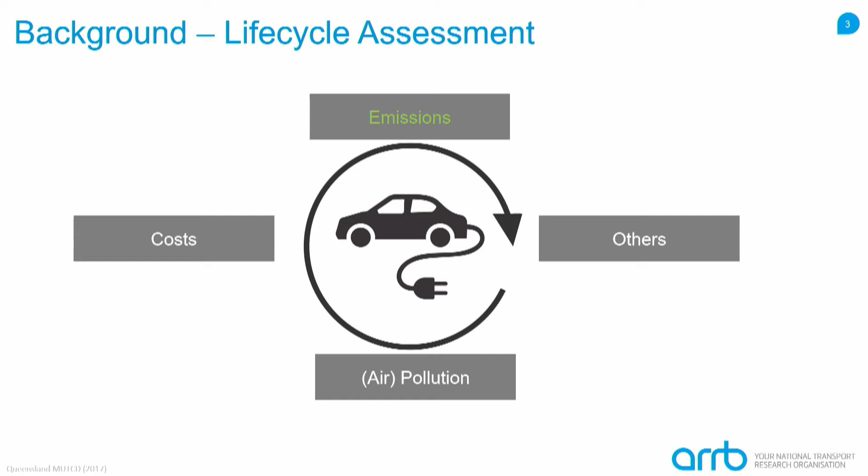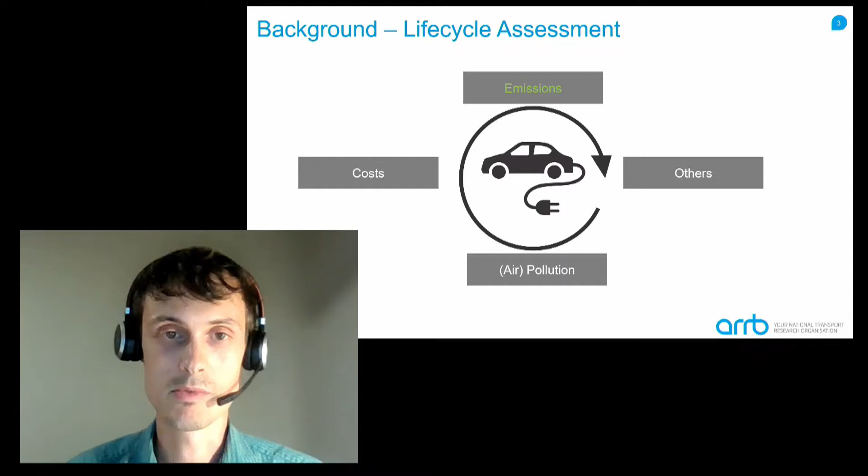As I mentioned, life cycle. When we talk about electric vehicles, we have to take into consideration different things such as costs, air pollution, and of course the emissions. Emissions is what I want to talk about in this presentation, but there are also quite a few other things. What I've been involved in personally is research on the costs side, the air pollution side, and other things such as the noise of electric vehicles, and saving fossil fuels for other applications rather than burning them in our cars. But this presentation is about the emissions, which is certainly an important aspect.

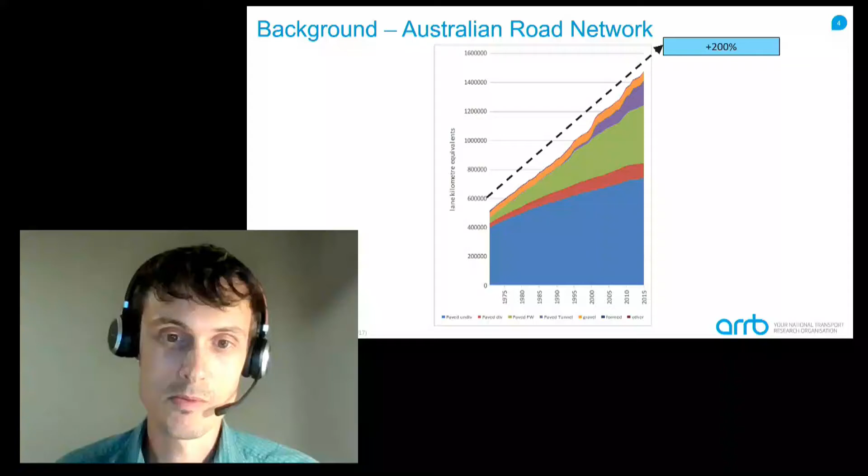A little bit of background - these slides show Australian data, but it may be a little different in other countries. If you look at the road network from the 1970s until today in Australia, there's a growth of 200% in our road network, and most of these roads are sealed roads, freeways, which means if there are more roads, there are more cars as well. That's actually shown on the next slide, where we can see the growth of the vehicles operating on the roads.

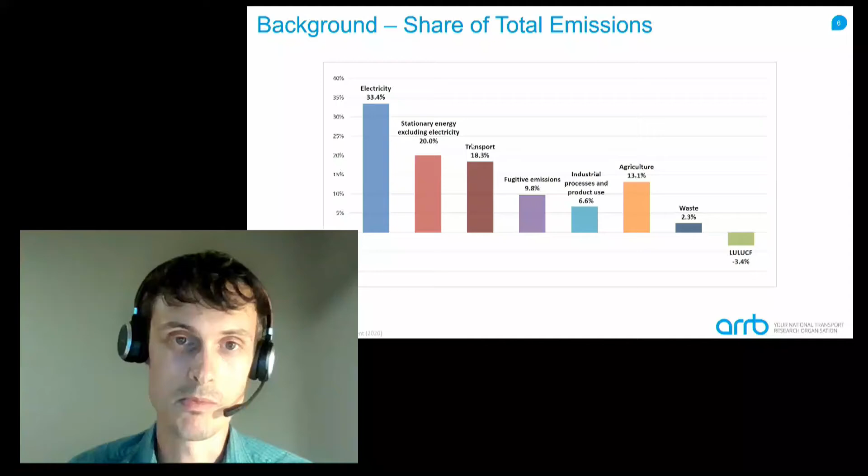This is another slide, again with some data from Australia - it might look a little different in other countries. We can see the brown column in the middle, which represents transport emissions as a share of the total emissions of the entirety of Australia: 18.3%, almost 20% of emissions come from the transport sector, and a third of emissions comes from electricity generation. If you highlight those emissions, we can see that most of the emissions from the transport sector are actually from road transport - not trains, not ships, and not airplanes.

It's road transport. So there's a massive potential to reduce emissions if we introduce cleaner electric cars, or cleaner modes of transportation in general on our roads. And if we can reduce electricity emissions as well, that's a very important point to consider when we talk about electric cars - we can't keep using the electricity we generate today, which in some countries is generated more by fossil fuels than others. So we need to transition to more renewable energy at the same time as we transition to electric vehicles.

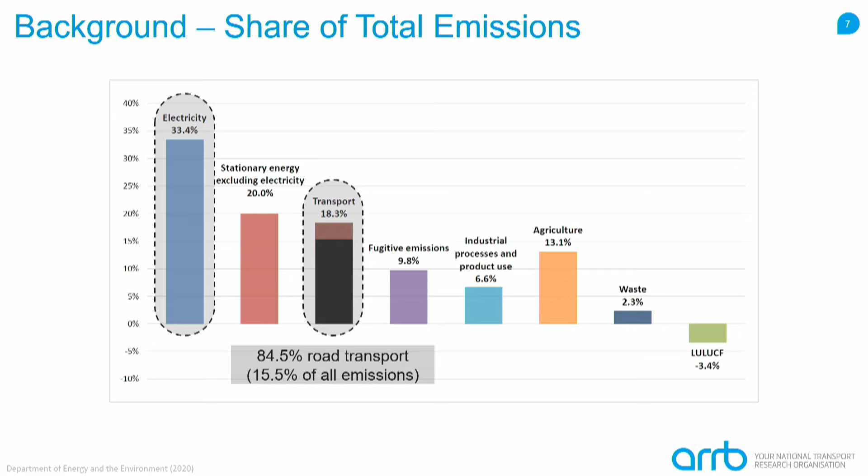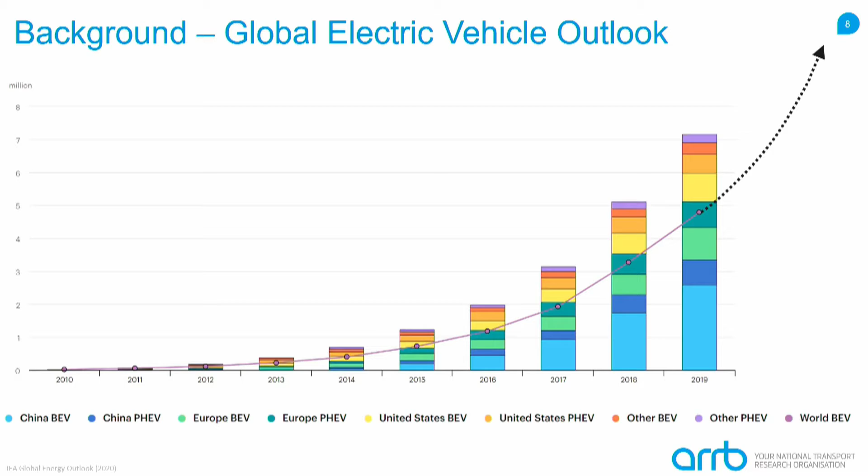Then I want to talk about the different phases: the manufacturing, the use phase, and the end of life of the vehicle. This is a very brief, high-level overview, but it gives you a bit of an insight into what I'm talking about here.

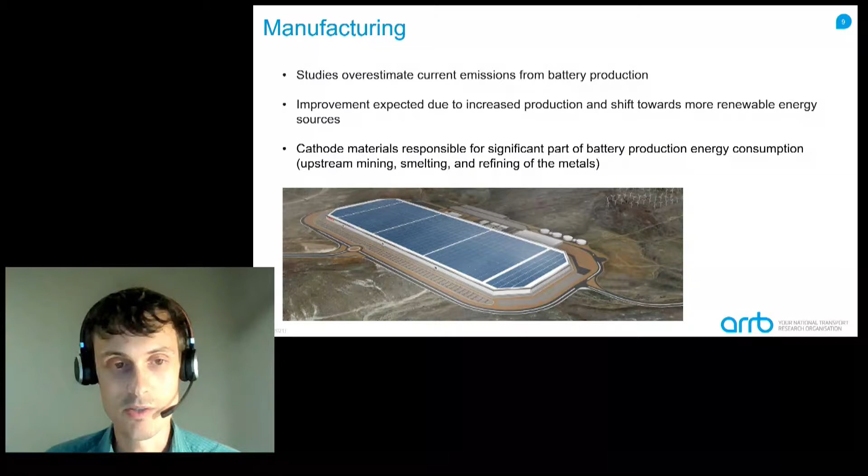In general, if you talk about manufacturing emissions, an electric vehicle is not so much different compared to a normal vehicle, except for the electric drivetrain compared to the diesel or petrol drivetrain. In particular, we need to look at the emissions from battery production, which is the majority of the difference when considering emissions from a battery electric vehicle compared to a petrol or diesel vehicle.

In the past, emissions from battery manufacturing have been estimated, but the studies we found are a little outdated. They use data from low volume manufacturing and average electricity mixes, which are going to become more renewable in the future. So overall, the estimated battery emissions in many studies today are a little too high—they're going to come down in the future. That's something we need to consider, although overall, emissions from manufacturing a battery electric vehicle will be higher than for a petrol vehicle.

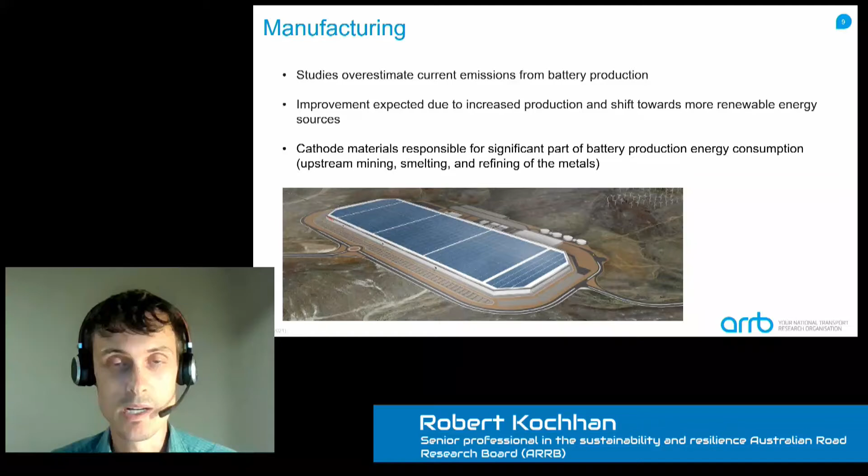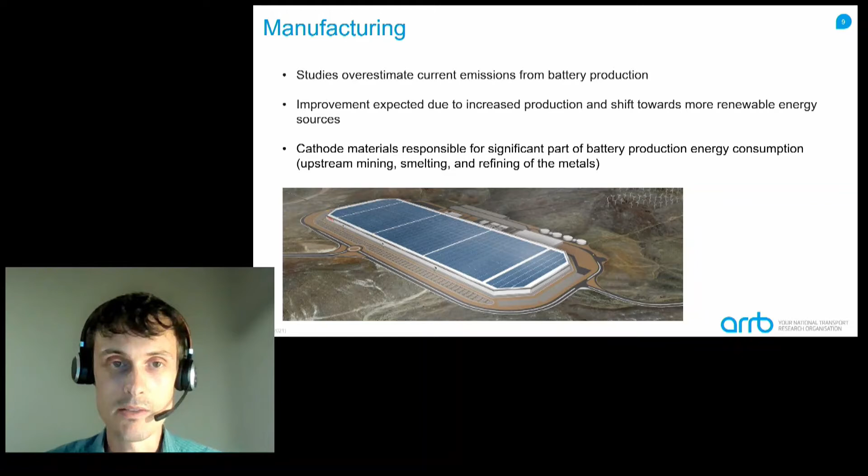This is mainly because there's a lot of energy that goes into the extraction and production of raw materials used in the battery, like the cathode materials, or the mining and refining of materials and metals. So there's still a bit of a disadvantage for electric vehicles in terms of life cycle emissions at the beginning, during the manufacturing stage, but that can be offset during the use phase. I'll talk about that a little later.

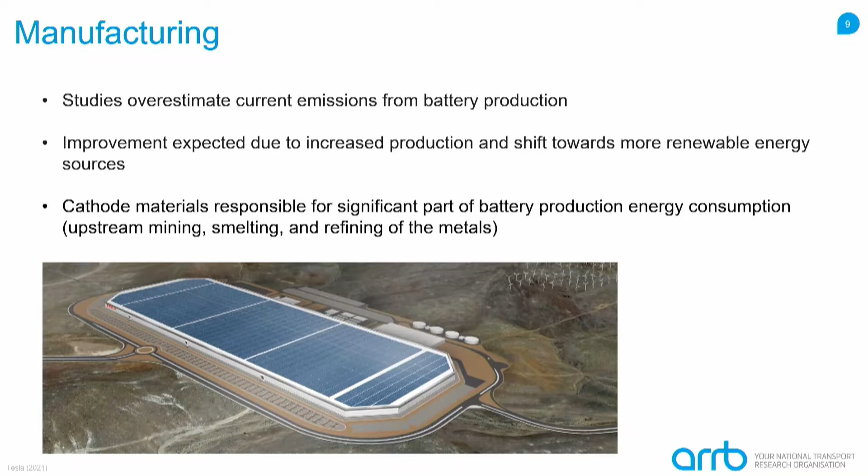The picture below, by the way, is one of the gigafactories of Tesla in the United States, with a lot of solar panels on the roof. That highlights that battery manufacturing may be cleaner than we think today, because of all the renewable energy used in this particular case.

Going on to the next slide, we see two different graphs showing what impact the carbon intensity of battery manufacturing has on the overall life cycle emissions of a car. On the left, the y-axis shows the savings potential in percent, and the x-axis shows the carbon intensity of the electricity generation. Of course, the more fossil fuels used to generate that electricity used to produce the battery, the less savings potential there is.

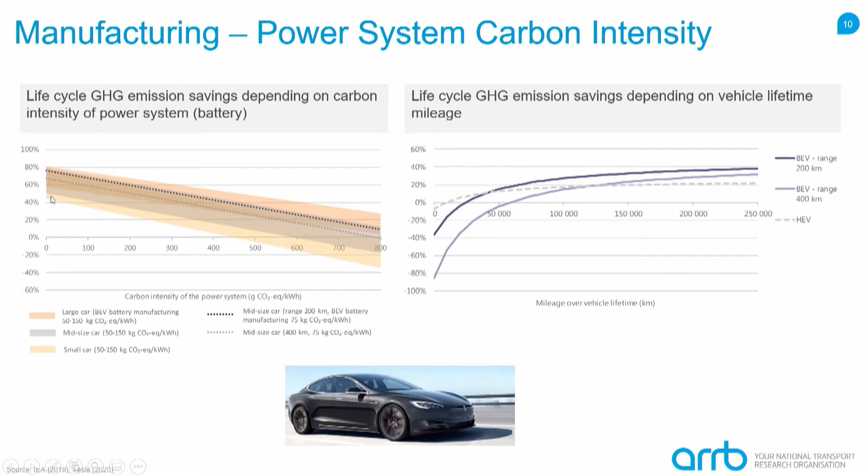If you get to a point where we have 600-700 grams of CO2 emissions per kilowatt hour of electricity used to produce the battery system, the life cycle emissions advantage of a battery electric car will be minimal. Whereas if we use fairly clean energy, there's a big savings potential in terms of life cycle emissions, 60 to 80% here.

On the right-hand side, that's a similar graph, but depending on the mileage of a vehicle. At the beginning of the life cycle, a battery electric vehicle has a disadvantage—negative 60 to 80% more emissions. But over time, as we charge the electric car with clean energy, it becomes better in terms of emissions compared to a petrol or diesel car.

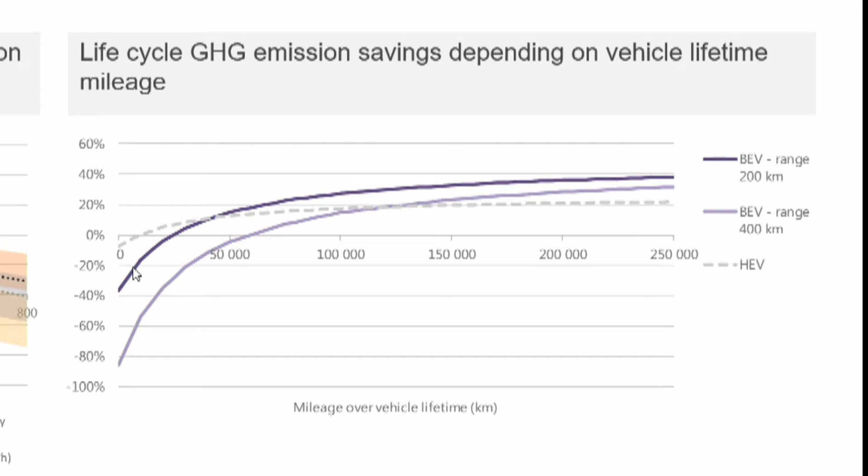Depending on the battery size, there are different lines in that graph. But that highlights that at the beginning of the life cycle, a battery electric vehicle will be more emission intensive, but over time it will gain an advantage compared to a petrol or diesel vehicle.

Then if we look at the use phase, that's the second phase, and probably the most important, because it creates the majority of emissions of the life cycle of the vehicle. I've put two terms here: well to tank emissions and tank to wheel emissions, both of which have to be considered for electric vehicles and internal combustion engine vehicles. Well to tank emissions are those created for manufacturing petrol or diesel and distribution to petrol stations, or for the generation of electricity used to charge our cars.

The tank to wheel emissions are the emissions from burning fuel in an internal combustion engine vehicle. There are no tank to wheel emissions for a purely battery electric vehicle because it's emission-free, locally emission-free. But we have to take both into consideration to get a full perspective of emissions during the use phase.

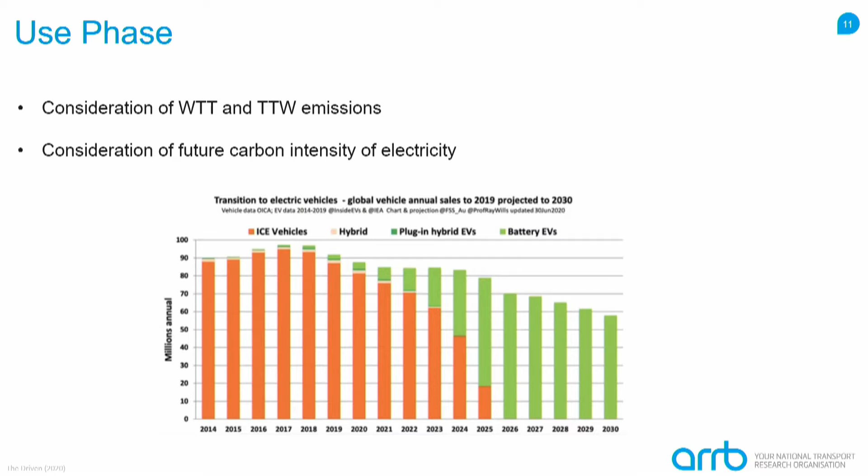We also ideally should take into consideration the future carbon intensity of electricity, because that's constantly evolving. When we do a study, we can't just use today's electricity mix, but have to consider that the electricity mix in the future is most likely going to be less carbon intensive, with more renewable energies in the mix.

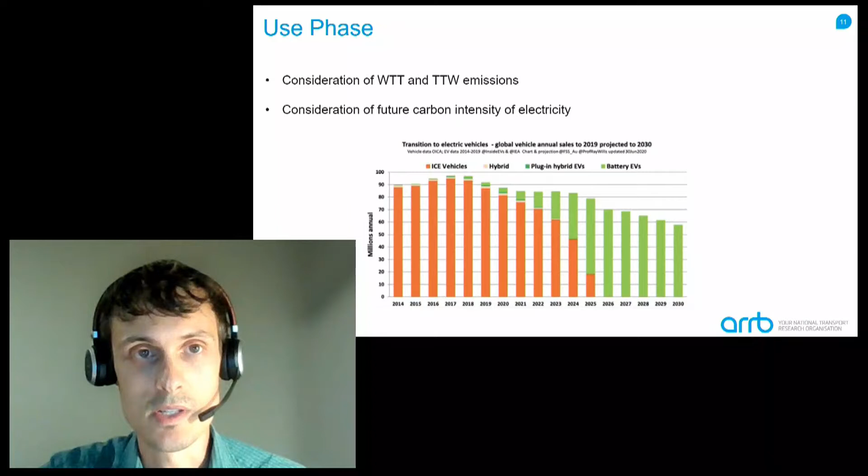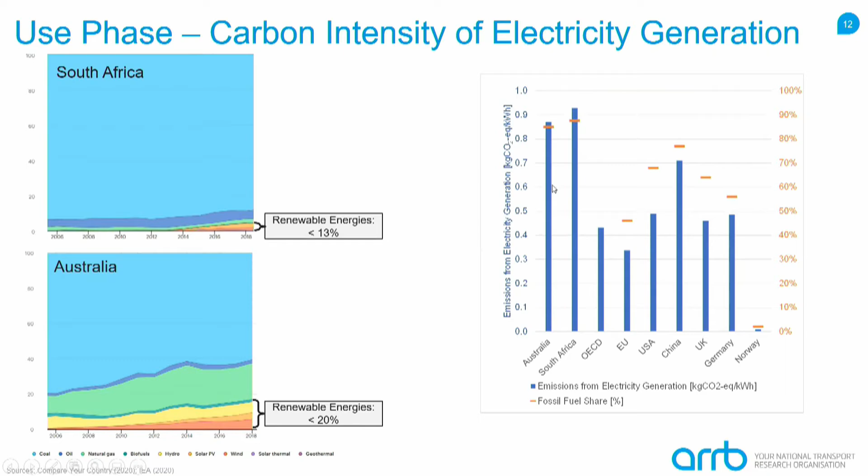I've put a few graphs here for South Africa and Australia in terms of electricity generation, because that's a very important part. As we can see, those two countries are fairly low in the renewable energy shares of the electricity mix. This is data from the International Energy Agency, so it's fairly reliable. Other countries, as you can see in the right graph, the EU, USA, China, UK, are all well below Australia and South Africa in terms of carbon-intensive energy generation.

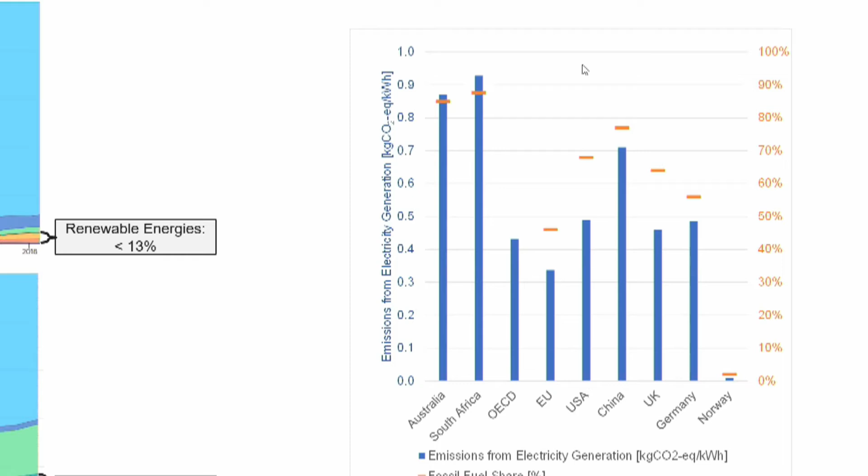The question is whether in Australia or South Africa we can still achieve an advantage from using electric vehicles compared to petrol diesel vehicles, if the electricity used to charge our cars is that carbon intensive. I've done some calculations about that, which I've put onto this slide here.

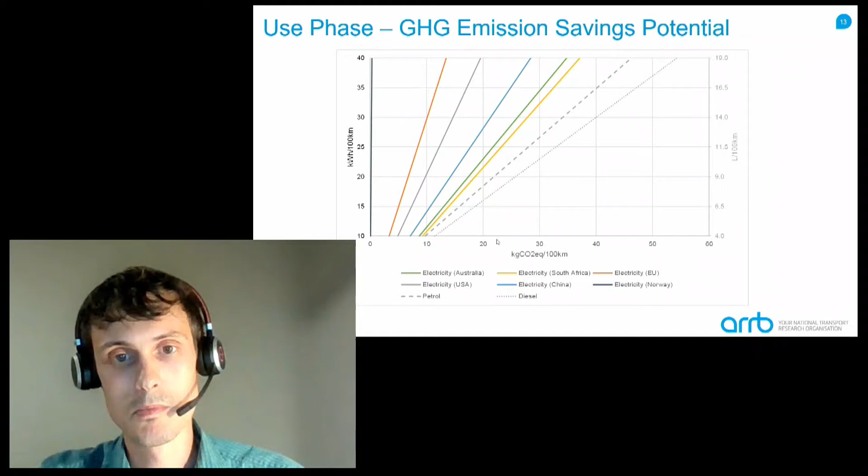This graph shows the use phase emissions in kilograms CO2 equivalent per 100 kilometers on the x-axis, with two y-axes: one on the right for liters per 100 kilometers of petrol diesel, shown as the gray dotted lines, and one on the left for kilowatt hours per 100 kilometers for the battery electric car, for the different regions presented in the previous slide - Australia, South Africa, and some other regions worldwide.

The cleaner the energy mix is, the further left the graph is on this figure. On the far left here we have Norway, which has almost 100% renewable energy from hydro, and South Africa and Australia are somewhere in the middle.

If you compare a vehicle that uses about 8 liters per 100 kilometers of petrol diesel, we end up at maybe 20 to 25 kilograms CO2 equivalent per 100 kilometers. Compared to a car using 20 kilowatt hours per 100 kilometers, all of these regions, even Australia and South Africa, can achieve savings in emissions from the use phase. Of course in Australia and South Africa not as much as where the energy mix is a bit cleaner, but still in those countries we can achieve something.

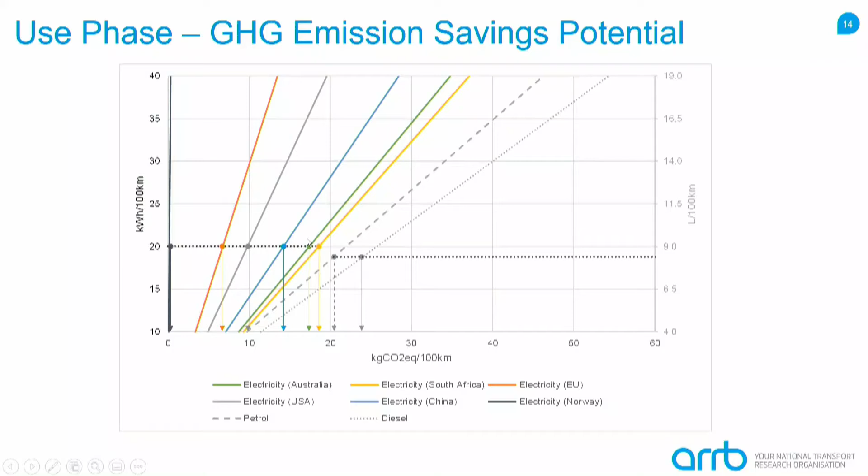I think this highlights pretty well that there's a certain potential there. The cleaner the energy gets, the better it is. But even at the current stage, some savings are possible.

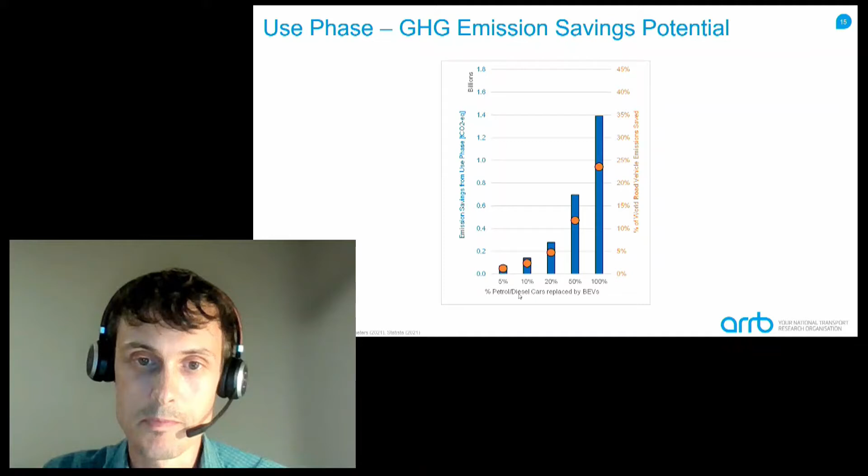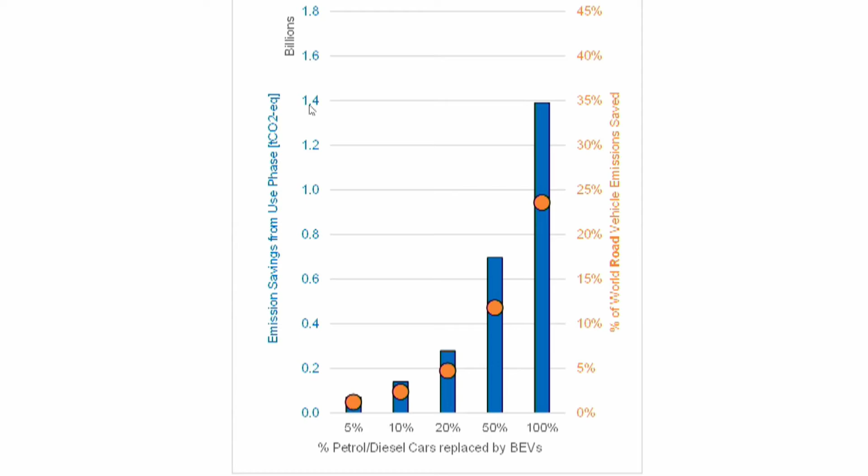If we extrapolate that towards higher levels of emissions, I've scaled up the values calculated previously and put it onto this graph, which shows the percent of world road vehicle emissions that can be saved if we consider, for example, replacing our petrol and diesel cars - 5% replaced by battery electric vehicles, 10%, 20%, 50%. If we replace all of our current petrol and diesel cars, we have the potential to save 25% of all world road vehicle emissions at this stage, representing about 1.4 billion tons of CO2 emissions per year.

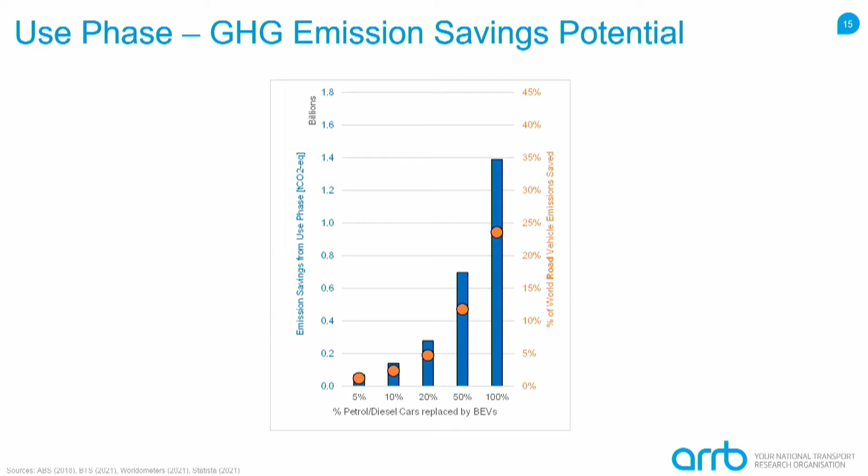So this is the use phase. There are certainly some savings potentials out there which we should be looking at. And then finally, of course, there's the end of life stage of the vehicle, and that's in particular the battery.

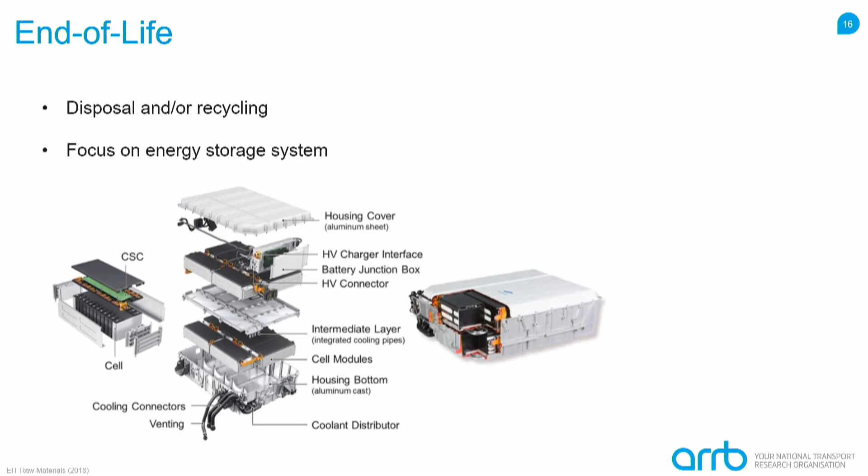Most vehicles, or the components of most vehicles, are recycled - the plastics, the rubber, the metals. That is not so much different for a battery vehicle compared to an internal combustion engine vehicle. But when we look at the battery, there's some new technology and materials in there which are not in a normal petrol vehicle, and that needs to be looked at in terms of recycling or a second use phase for such a battery.

But we should also take into consideration the process of collecting those batteries, the supply chain process, which adds even more emissions to the overall cycle in terms of collecting those batteries, transporting them to recycling facilities, and so on. That's a part that can also be optimized.

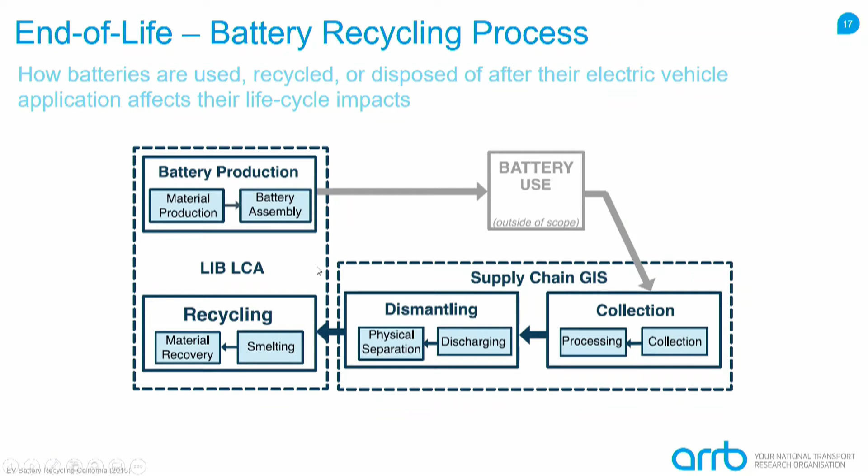Finally, I want to show this graph, which shows a little bit the different technologies that are possible to recycle those batteries. On the left side here, we can see the percentage of emissions compared to lithium-ion battery production, which is the 100% line, compared to recycling a battery.

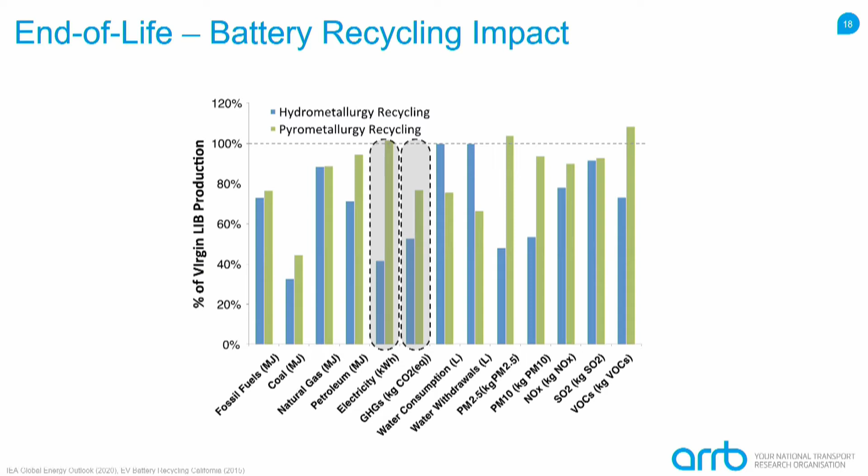So if we were to produce a new lithium-ion battery from virgin materials, we would be at that gray line. If we recycle the battery with different technologies, we would look at the blue and green bars. If we look at greenhouse gas emissions, for example, both of these technologies have some savings. So it certainly makes sense to recycle batteries if we optimize it in a certain way.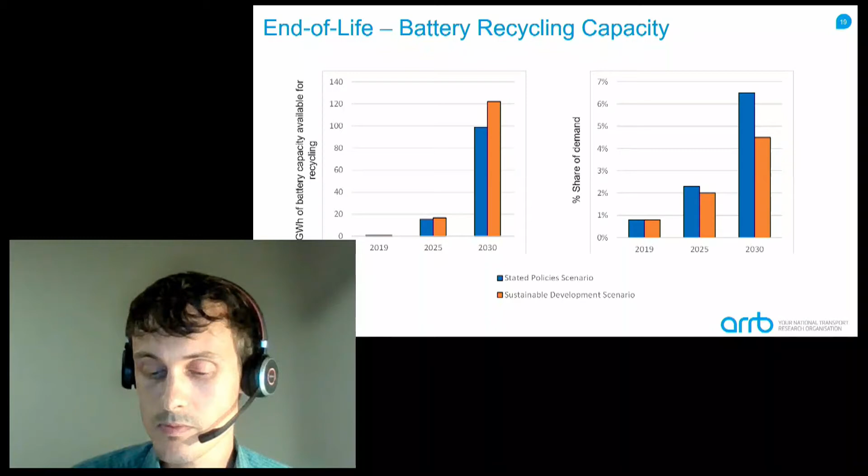In order to reuse those materials in new battery production compared to just using virgin materials. However, there's a problem, shown in these graphs: at the moment, the number of batteries available for recycling is very low, because the number of electric vehicles on our roads is very low, and they are also fairly new vehicles, so they haven't reached their end of life yet.

So the available gigawatt hours of battery capacity that is available for recycling is far lower than the actual demand for new batteries. So there's still a need to produce virgin batteries from virgin materials.

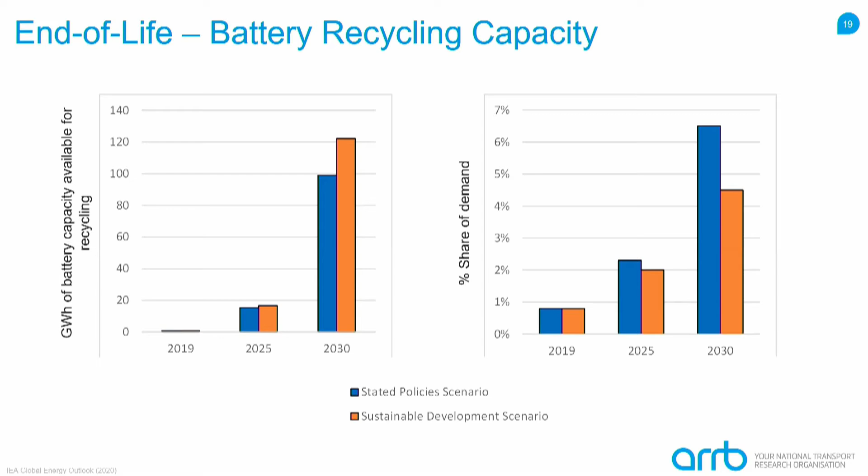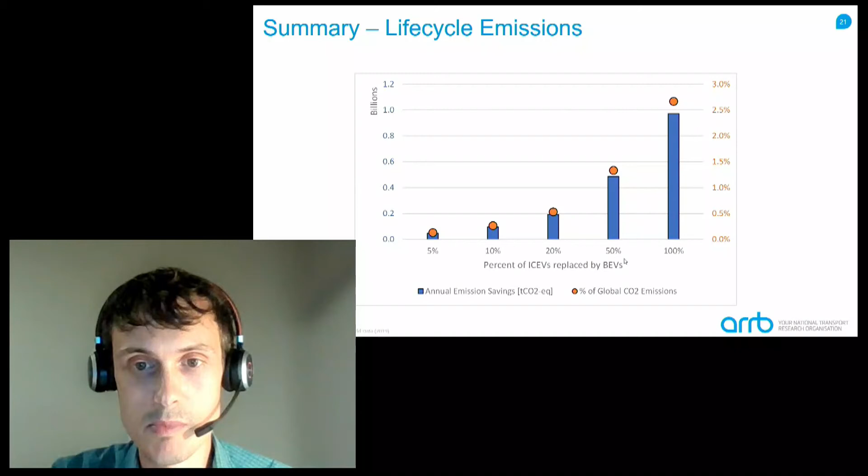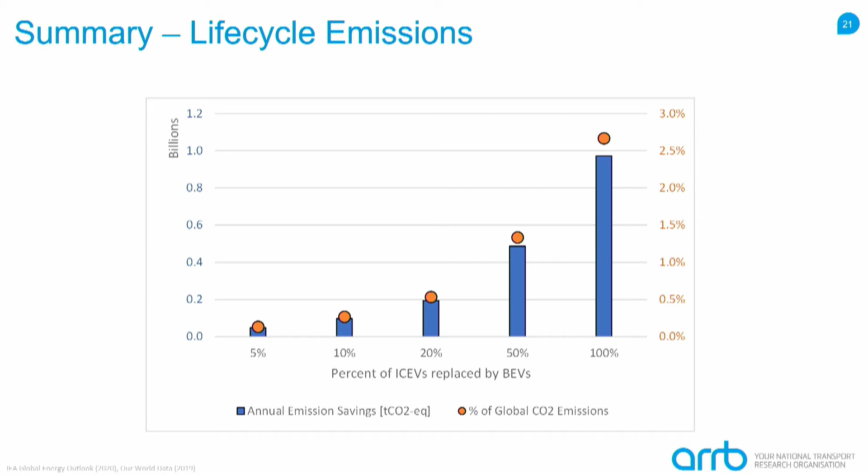And finally, if we scale this up again, so if we look at the total life cycle emissions in this graph and look at the global annual emissions, replacing our internal combustion engine vehicle by battery electric vehicle, you can achieve about 2.5% of emissions reduced on a global scale. That is about 1 billion tons a year in terms of life cycle emissions.

Well, that was a very quick overview of everything. I hope that's sort of understandable. I'm happy to answer some questions right now, or after the break, and then I will go into what ARRB has been doing in terms of their projects a little bit in that space.

Well, I think Robert, that's a lot of information, and a lot to digest. I've got one question straight away, which is, if we look at the share of the vehicle life cycle emissions, what percentage of these are from manufacturing emissions?

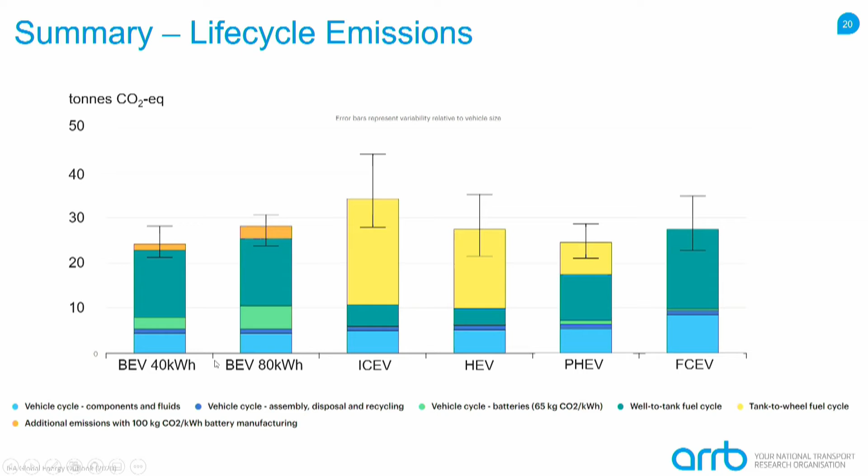The life cycle emissions - if you go back to this slide here, we look at the bottom of the graphs. If you look at the light blue and dark blue share, you can see the bottom part, which is the manufacturing emissions, and all the top part are basically the use phase emissions. So if you compare the bottom blue part to the overall height of the graph, that's maybe about 25% of the overall emissions, on a global scale. Of course, it depends very much on how clean the energy is that you use to charge your car. If you have a house with solar panels on the roof, and you always charge your car at home, then the use phase emissions will be very low, and the share of manufacturing emissions compared to the overall life cycle emissions will be much higher than 25%.

Look, it's interesting to look at the whole life cycle of a vehicle, not just the part of the road, and understand the full life cycle of it.

Devon? Yeah, I've got a very interesting question. Robert, nice to meet you. What is the share of road transport greenhouse gas emissions in other countries other than Australia?

To be honest, I don't have a figure about that for other countries specifically. I know that in Australia it's about 18%, as I showed. However, I looked it up as part of my research - on the global scale, it's roughly 11.5 to 12%. That's a global average. Of course, it probably depends very much on the country, whether there's a lot of road-based transport or a lot of rail transport or other forms of transport. I can't really answer the question fully, but on a global scale, about 11 to 12% of all emissions come from road transport.

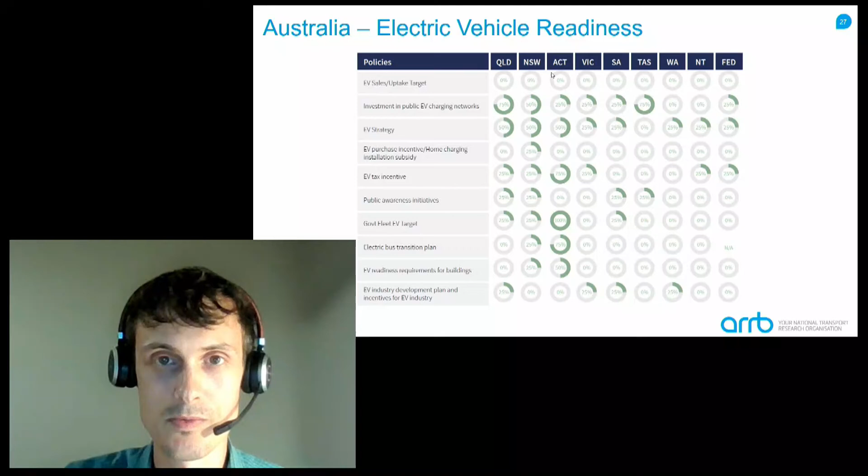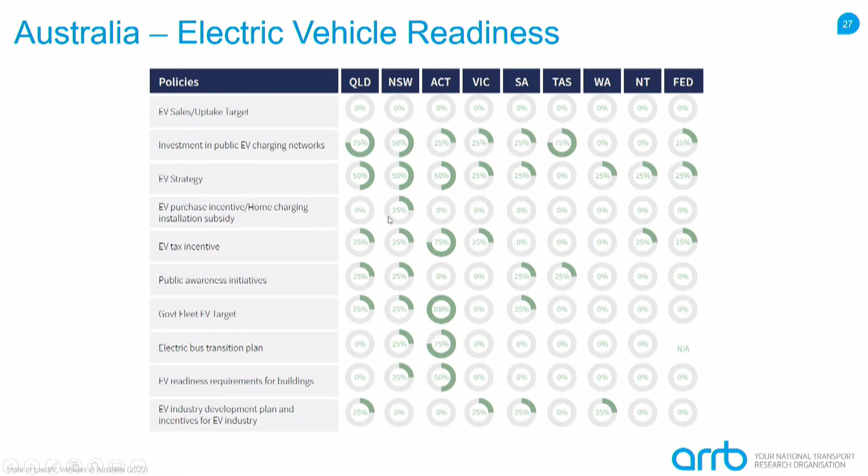This is another overview for the different states in terms of readiness for electric vehicles. For example, the Australian Capital Territory, which is Canberra, is probably the most electric vehicle ready. They have a lot of government fleets and electric vehicles being used. But in the other regions of Australia, it's fairly low. I'm working at ARRB to look into this and try to find out what we should be doing by looking at other regions worldwide as well.

I want to share some of the projects we've been doing here that are potentially interesting for everyone to look at, in terms of electric vehicles or related policies and measures we've been examining.

The first project is the Pavement Lifecycle Sustainability Assessment Tool, which I'll go into in more detail shortly. Then, of course, we have the low and zero emission vehicle policy that I was just talking about before.

Decarbonization of the heavy vehicle sector is another project. We've been advising one of the agencies in Australia on what they should be looking at in terms of bringing down their emissions from the heavy vehicle sector, the mining sector, and road transport, trucks for example.

We've also been looking at standardizing signage for low and zero emission vehicles, because there's a real issue developing in Australia with the uptake of electric vehicles, where every region tries to do their own thing and comes up with different symbols for electric vehicles on road signage. We are looking at standardizing that, proposing standardized signage or symbols.

This tool allows us to compare different pavements and pavement typologies, also with the integration of alternative materials where we can recycle materials, for example crushed glass or crumb rubber from tires, which we can put into pavement in order to lower the overall emissions impact of that pavement.

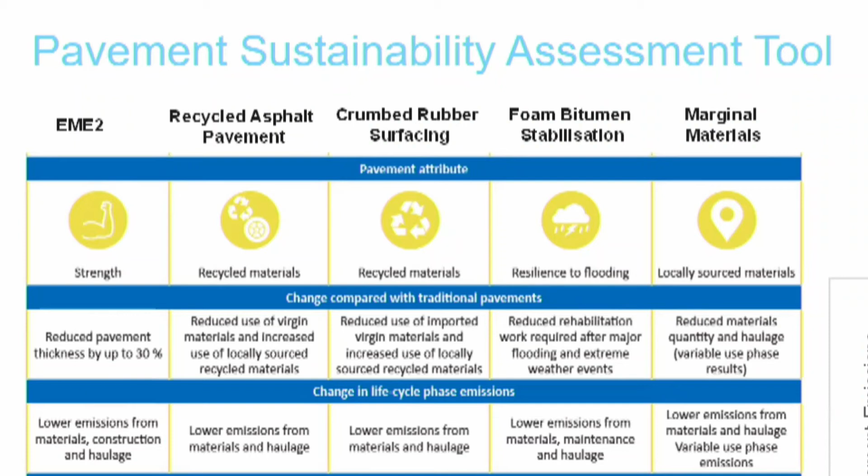A very important finding from this work was that the vast majority of all emissions of a pavement are not generated by the pavement itself, its construction and maintenance, but by the vehicles that run on that pavement over its life cycle of 10, 20, 30 years. Depending on where the pavement is located, it varies how much of the emissions come from road transport, but mostly it's in the range of 80 to 90%, especially on urban roads, not so much on country roads.

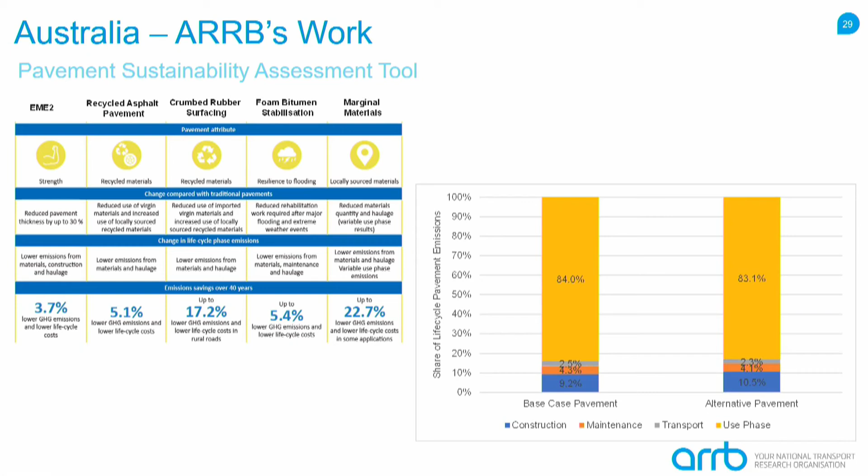That's one of the findings that highlighted to us how important it is to look at the use phase of a pavement, so the cars itself, and how we can reduce emissions from that use phase. That, of course, includes looking more at the electric vehicle space for our road transport. That's one of the bigger projects we've been working on and are still working on.

One of the other projects is the decarbonization of the heavy vehicle sector. As I mentioned, it's one of the projects we've been doing for one of the state road agencies in Australia, and we've been collecting different opportunities for them to lower the impact of heavy vehicle road transport, including mining and agriculture.

On the left here I've put a few examples we suggested to them. One is the electric waste truck. These have already been running in different parts of Australia, and it makes sense to use such a truck compared to a diesel truck because it's mainly used in low speed, stop-and-go traffic collecting curbside bins. In that application, an electric motor is much more efficient than a diesel engine, which saves a lot of emissions, and there's less noise involved as well - the electric motor is much quieter going through the suburbs.

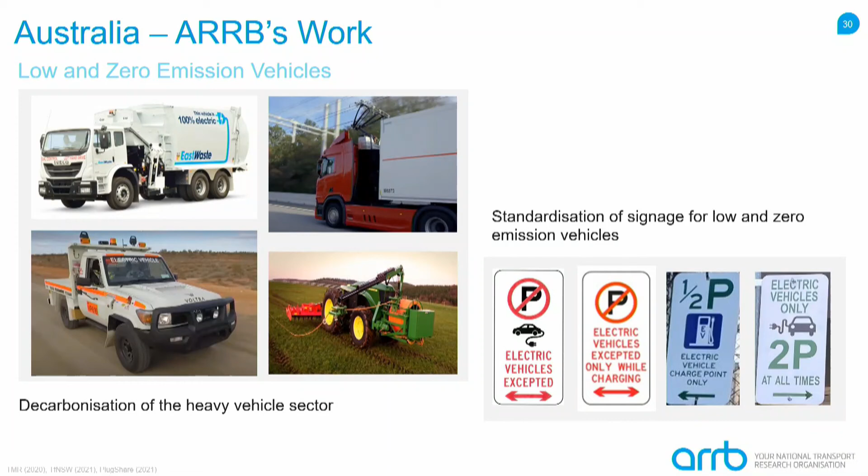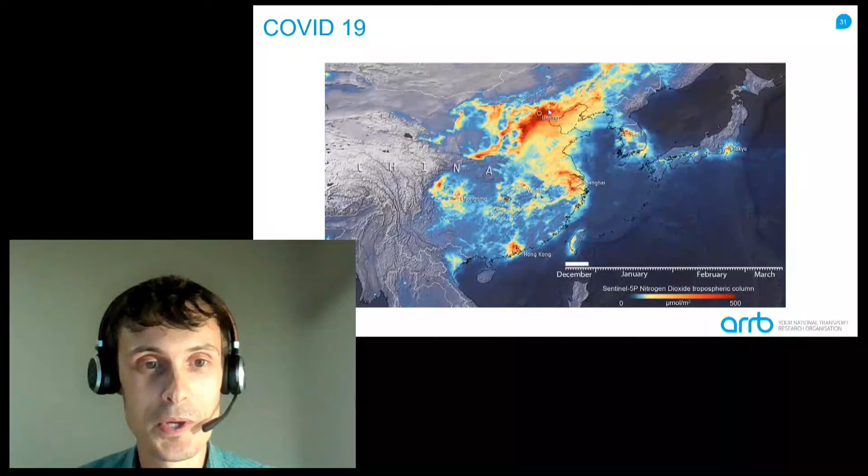That covers some of the key projects in that space that we've been working on. I hope to answer some questions, but I want to wrap up this presentation with a COVID-19 overview. About a year ago, when the entire world was winding down transport and industry applications and running down economies, we saw a massive reduction in carbon emissions and pollutants in general.

Through the electrification of our transport system, it's hopefully possible to not just have this reduction as a short-term effect - because after that period, economic activity ramped up again and all the emissions came back. Through the introduction of a clean transport system, we hope it's possible to achieve something like that reduction in the longer term as well, and contribute to the climate goals we've set for global warming.

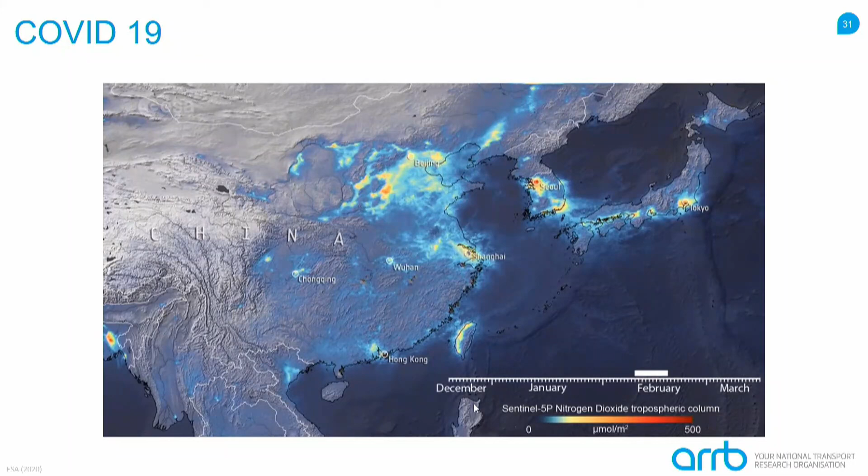That's about it from me. Awesome, thank you, Robert. I mean, happy to answer questions. Yeah, I mean, a lot of information, a lot for us to digest.

Really some interesting stuff that you guys have been up to. I think maybe for a South African context, my main question to you is, you've modeled South Africa against Australia. We look over the pond and we see Australia is doing much better than us. What can we do in South Africa to increase our electric vehicle uptake? All these things that you've spoken about, the making it more environmentally friendly, low carbon emissions, all these great things that you've spoken about, I think we're all on board with it, we all want to do it. What can you, as an expert in your field, advise South Africa to do to increase electric vehicle uptake?

Well, first we have to know what we have been doing already in terms of electric vehicle policies. But in general, I think it's very important to promote electric vehicles, and have a very good incentive, or initial incentive, to increase the uptake. If you look at examples in Europe or Norway even, they have put a lot of purchase incentives on electric vehicles, which made electric vehicles cheaper to buy than petrol vehicles, and that is probably a very good incentive initially to promote the uptake of electric vehicles.